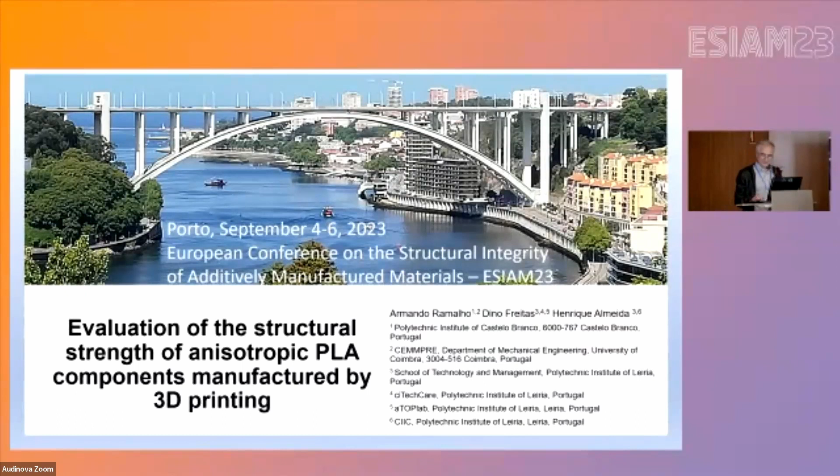Fused filament fabrication, a material extrusion process used in low-cost 3D printing, is one of the most affordable manufacturing processes for producing complex geometric components. Finite element analysis is the best method to evaluate the mechanical behavior of complex geometric parts obtained in 3D printing. The layer-by-layer slicing sequence of 3D printing is prone to introduce anisotropy into the materials.

In this communication, it is evaluated the structural strength of an anisotropic PLA bushing manufactured by 3D printing, specifically a bushing that belongs to a hinge drawer support and is subjected to in-service loading.

The material properties of the anisotropic PLA are obtained in literature. The structural strength is evaluated using the maximum stress, the Tsai-Hill and the Hoffman criteria. A previous preliminary finite element model developed by the authors is updated and implemented in Marc software to deal with the used failure criteria.

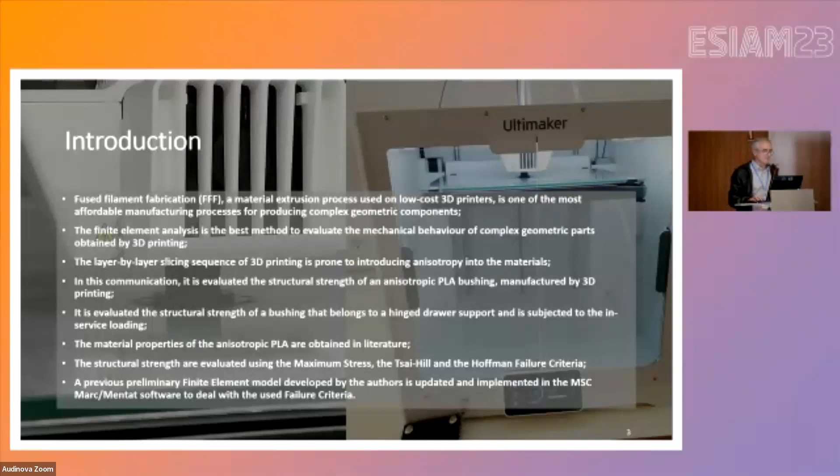The component analyzed in the study is the bushing of a hinged drawer support. The drawer and its content have a design weight of 20 kilograms. The parts of the hinged drawer support are made in ABS and manufactured by injection. A preliminary reverse engineering bushing design was done in previous work.

Here are the main inputs of this work, and at the end are the main manufacturing parameters for the bushing.

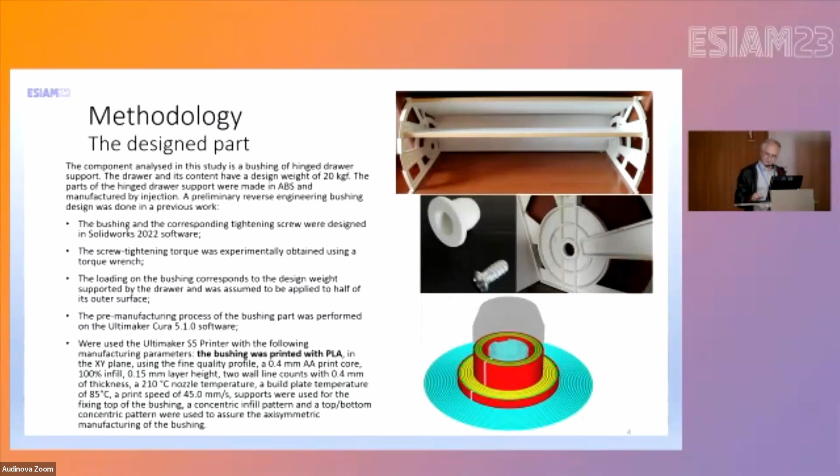In order to account for anisotropy in the failure of the bushing, theories from composite materials were used. Each layer of the manufacturing process is treated as a lamina, and the stacking of these layers forms an orthotropic material. Three criteria were considered in the study.

The maximum stress criterion considers that the material fails when the stress exceeds the respective allowable. Six failure indexes are defined, each one related to one condition of failure. The equations used to compute the failure index are the following.

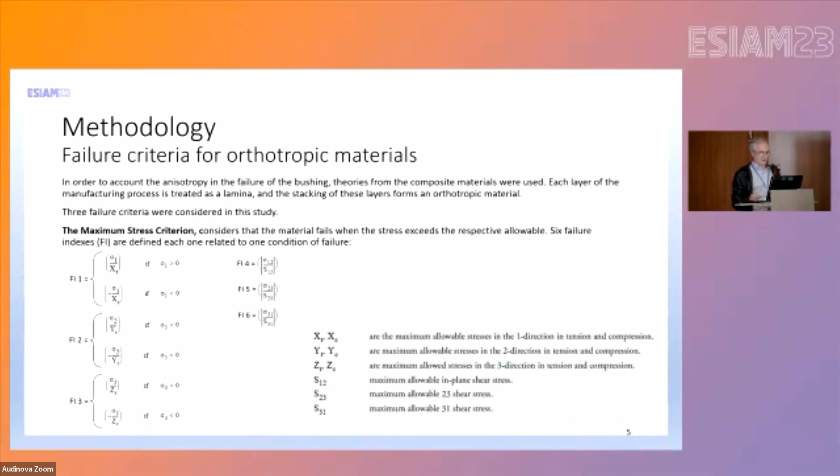The Tsai-Hill criterion considers that the orthotropic material fails when the failure index exceeds 1, and it's assumed that the tensile and compressive behavior of material are identical. The failure indexes are computed using this equation.

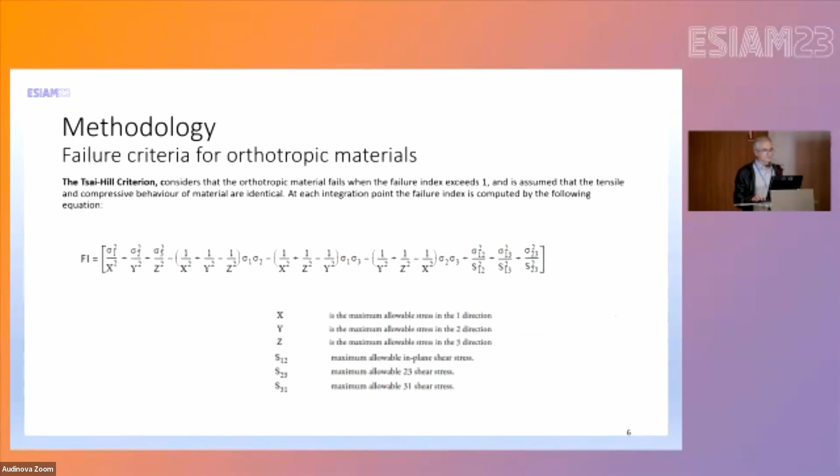The Hoffman criterion is similar to the Tsai-Hill, but allows unequal maximum stresses in tension and compression. The failure index is given by this equation.

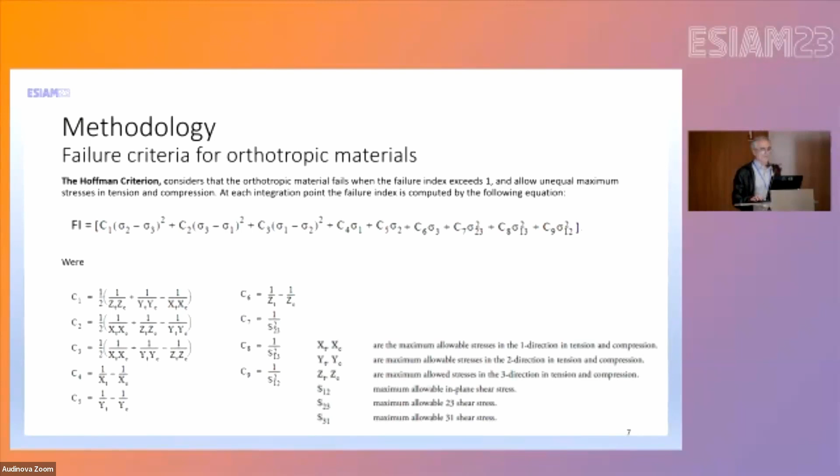All the numerical simulations were performed on a computer running Windows 10 with an Intel Core i7 processor with 16 gigabytes RAM, and the finite element model was developed in the finite element software Marc 2021.

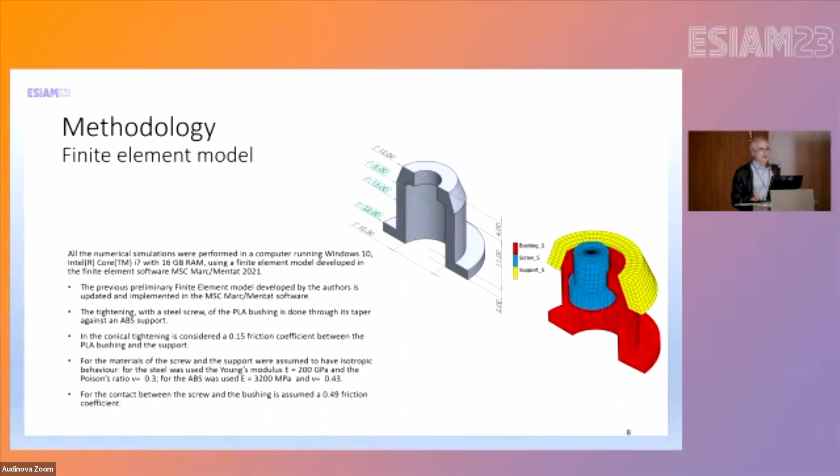Here are the main inputs for the numerical model. The orientation of the mesh elements was considered for the anisotropic axis of the material behavior. The simulation used an axisymmetric mesh and structured mesh. This is the main characteristics of the mesh.

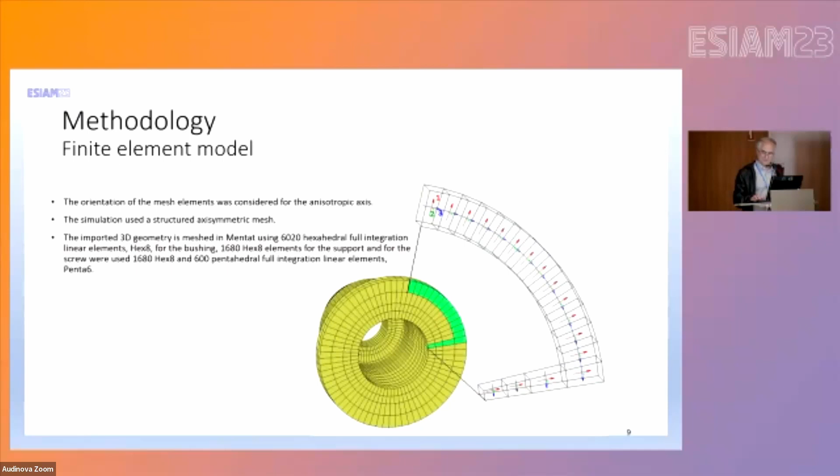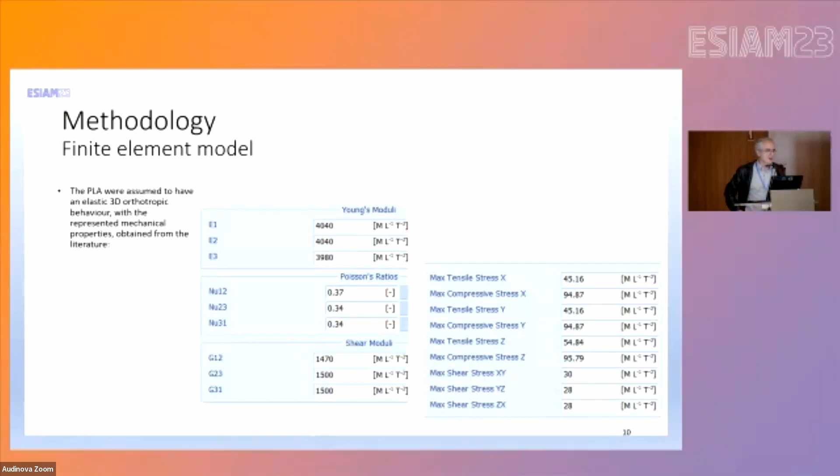Here we have the local orientation of the axis of the elements, and here we have the material properties used to simulate the material behavior of the PLA.

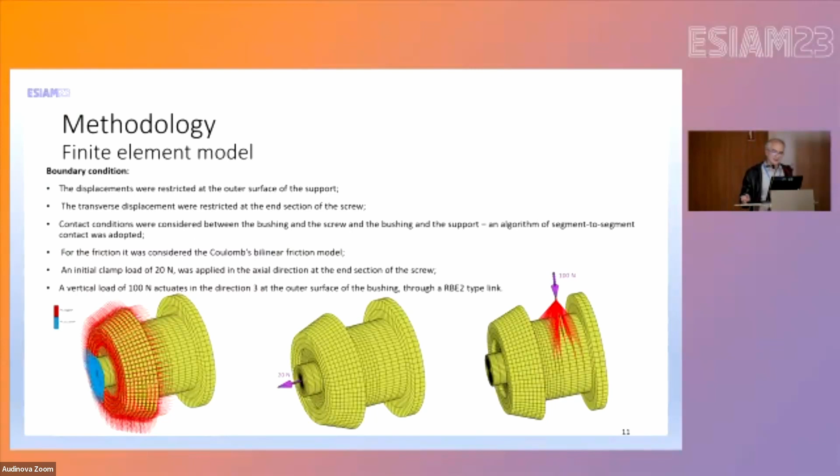An algorithm of segment-to-segment contact was adopted. For friction, the Coulomb bilinear friction model was considered. An initial clamp of 20 newtons was applied in the axial direction at the end section of the screw. A vertical load of 100 newtons actuates in direction 3 at the outer surface of the bushing through a link, in red.

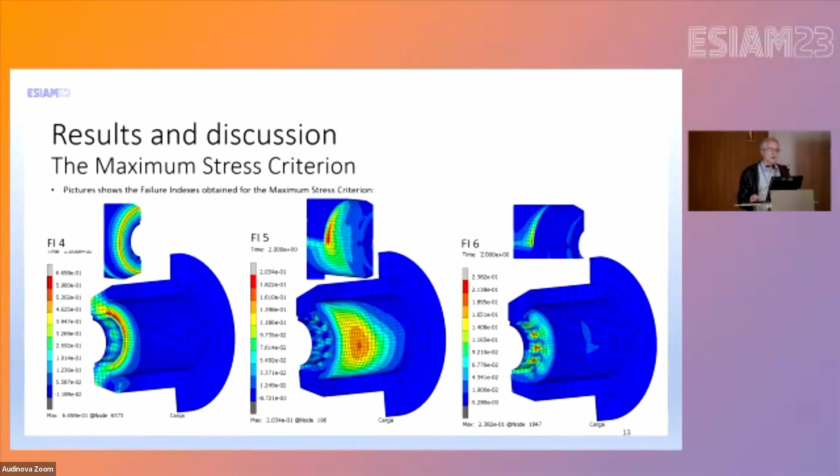Here are the results obtained for the failure index field for the maximum stress criterion. I think the higher values occur in the contact between the bushing and the head of the screw, for all these failure indexes. Here are the remaining failure indexes for the maximum stress criterion.

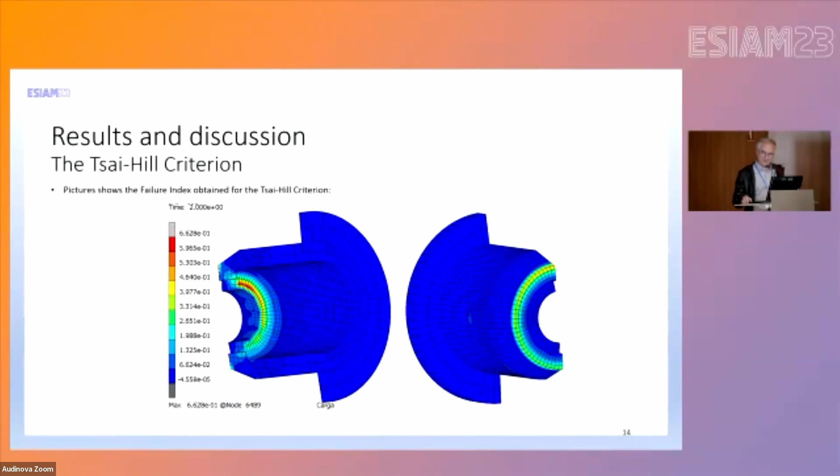This picture shows the failure index obtained for the Tsai-Hill criterion. The maximum value for the failure index occurs in the same position. And this is the one for the Hoffman criterion.

From the presented results, one can assure the structural safety of the 3D printed bushing under the in-service loading. All the failure indexes of the used failure criteria are below the maximum admissible values. The more critical one occurs for failure index 4 in the maximum stress criterion at the screw head interface. All the other criteria have their maximum absolute values at the same position.

The mechanical properties obtained in the literature for the PLA reveal an ultimate tensile strain below 4.5%, and the compressive strength is substantially superior to the tensile one. For this material, it is recommended to use the maximum stress criterion, or alternatively, the Hoffman one.

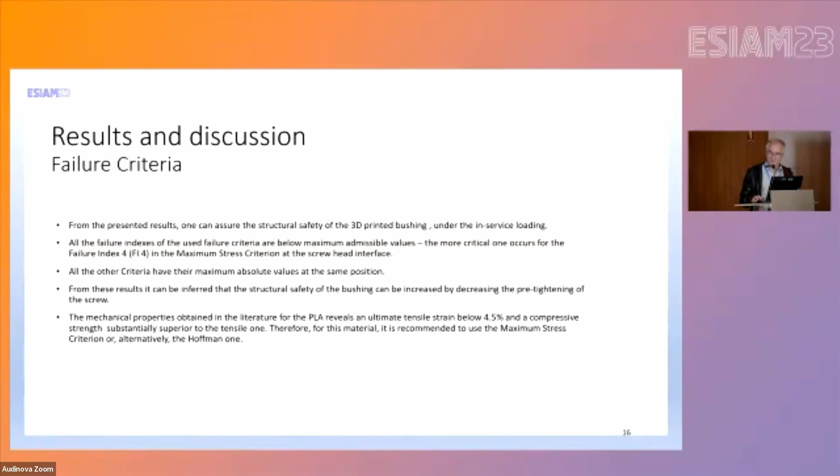As a conclusion, through the study it was possible to manufacture by 3D printing a bushing that resists the in-service load conditions. It is a project with confidence.

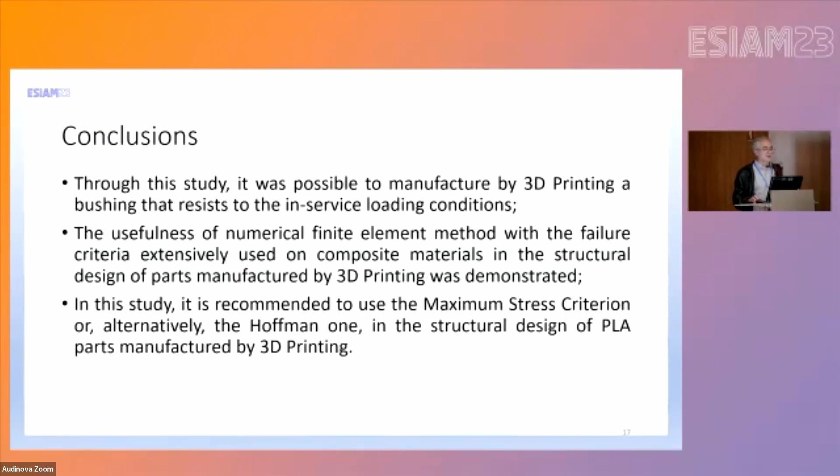The usefulness of the numerical finite element method with failure criteria extensively used in composite materials, applied in the structural design of parts manufactured by 3D printing, was demonstrated. In the study, it is recommended to use the maximum stress criterion, or alternatively the Hoffman one, in the structural design of PLA parts manufactured by 3D printing. Thank you.